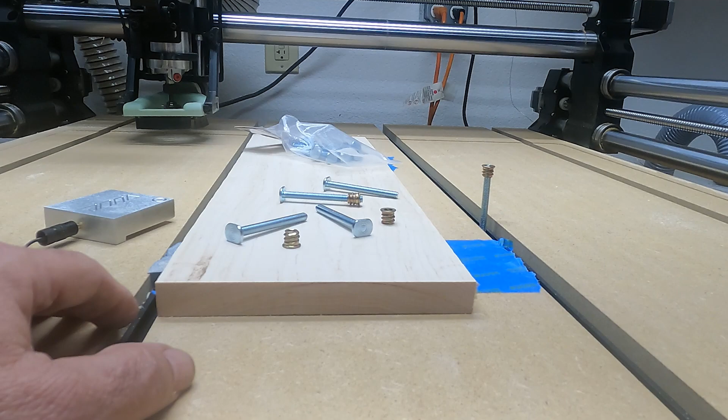So today we are going to design some wood clamps for my Onefinity CNC router. I've got a piece of hard maple here I've already surfaced down. I got it right to the right thickness and it's already attached to the board ready to go. I've got T-bolts here, 2.5 inch T-bolts. I've got threaded inserts. I'm going to make my own knobs to clamp these down with too.

So we're going to design this thing, and then I will probably do another video and we'll actually cut these things out, and then I'll do a separate video for the knobs too. Okay, so here we are in VCarve Pro, and this will work in any of the Vectric software, VCarve Desktop, Aspire, it doesn't matter which one. This should all work in all of them.

So we want to create a new file, and my actual board that I've got cut out there on the CNC right now is 21 by 6.5. The actual thickness of it is 0.738. It was going to start out at 3/4, but that's what I ended up with after I surfaced it. We want to start at material surface, and we want our XY datum at the bottom left-hand corner on this design, and you'll see why in a minute. And of course, it's single-sided. So go ahead and hit OK.

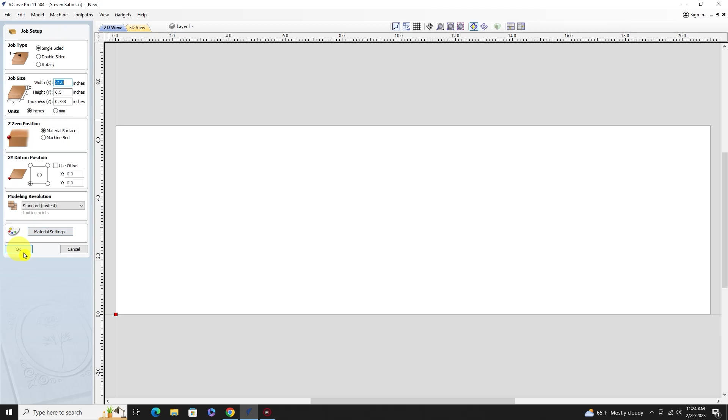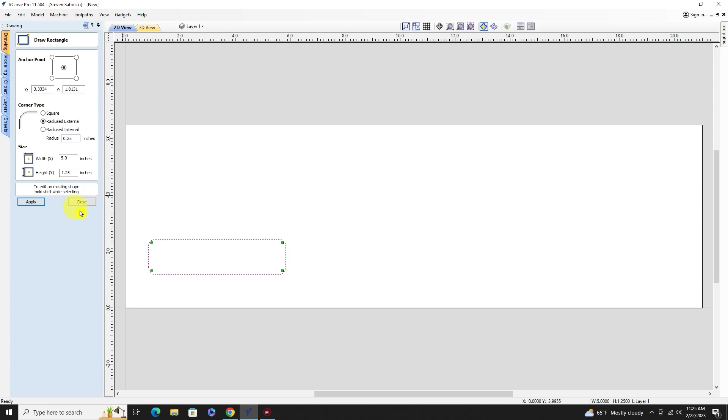So the first thing we want to do is draw a rectangle. Just draw a rectangle out, and then come in here and change the width to 5 inches. We're going to make 3 different sizes, but we're going to start with the 5 inch. So 5 inch times 1.25. And then we want to put a radius on this thing. Let's try a 1/4 inch. I think a 1/4 inch might be too much. No, actually a 1/4 inch looks pretty good. I think that's a good radius right there to start with.

So the next thing we want to do is position this thing, so you come over here on the move selected objects, and that's why we wanted to pick this lower left hand corner. So pick the lower left hand corner on this again, hit absolute, and on the far left hand side over here, I want a 1/2 inch. So let's just put 0.5 inches, and I want 0.3125 on my Y position, and go ahead and hit apply.

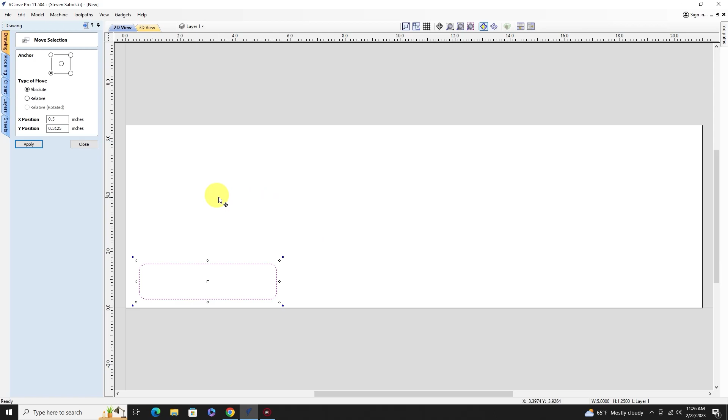And the reason is I'm going to cut this whole thing out with a 1/4 inch end mill. I'm not going to ever change bits on it. So I want to leave enough room over here where I can put tabs in. So I have a 1/2 inch. I'm going to cut a 1/4 inch out, so that'll leave another 1/4 inch of meat to attach a tab. I'm going to have tabs on the end, so I want space between the ends of each one of them. Okay, so that's my first rectangle ready to go.

Okay, so now we're ready to make our slot. So we come back in and make another rectangle a little bit smaller, and we want to make this rectangle 1 inch shorter than the actual profile here. So we want to go 4 inches here, and then our height we want to make it 0.26, and that's going to give us enough for a 1/4 bolt to go through and a little bit of clearance. If you're using a different size bolt, you may have to adjust this for your slot.

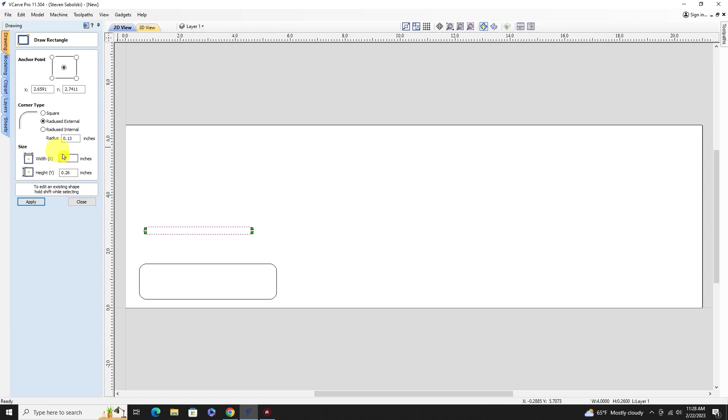And we want to leave the radius external on there, and with that size it doesn't matter what you put. You can put 0.5 on that radius, and when you hit apply, it's going to change it to half of your height. So you just want a full radius where it's going to round the ends of it off.

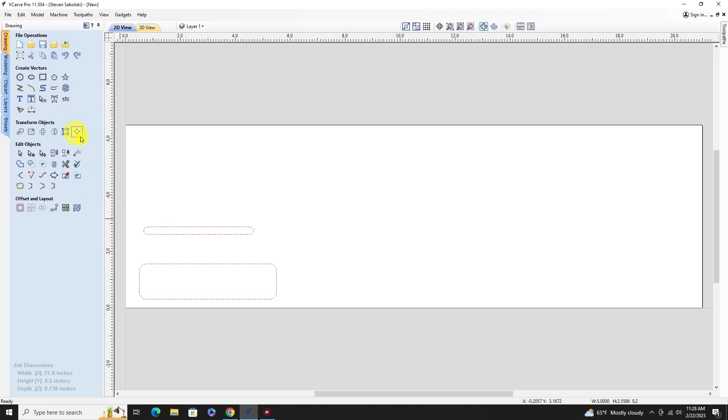Go ahead and hit apply, close, and then the easiest way to do this probably is highlight that, hold shift, highlight your other one, and then come in here on your align selected objects, and instead of align to material, you want to align to selection, and that'll sink that thing right in the center of that box right there. Okay, so that's 2 of our 3 pieces that we got to do.

The next piece, we want to make one more rectangle, and this one we want to make a 1/2 inch shorter than our whole profile, so that one's going to be 4.5 inches. Our height is 1.25, but we want to make this one a little bit bigger. This is just going to be a pocket to cut the meat out of this thing. So instead of going 1.25, let's go 1.5 on our height on that one.

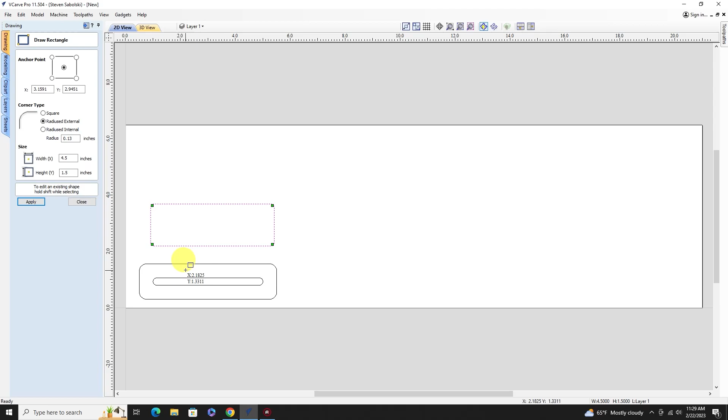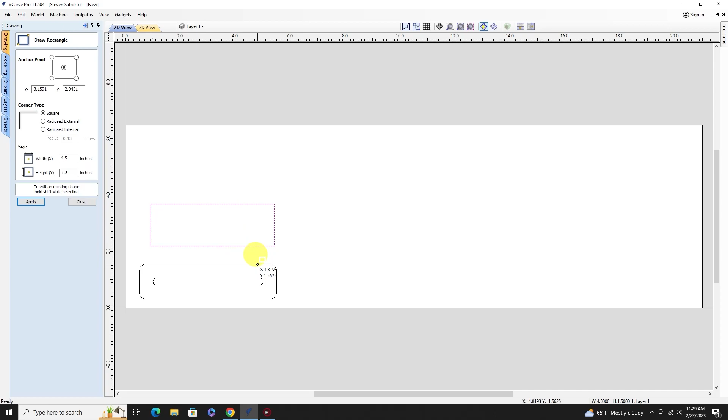While that one's selected, go ahead and hit shift, select the, oh, you got to close that first. Get rid of that. Always forget to close this over here. Oh, we need to fix this too. Go back into our rectangles, and we want that one to be square. Just highlight it again, go back to rectangles, and then square, and then enter or apply, and it'll go away. So now we got this one highlighted.

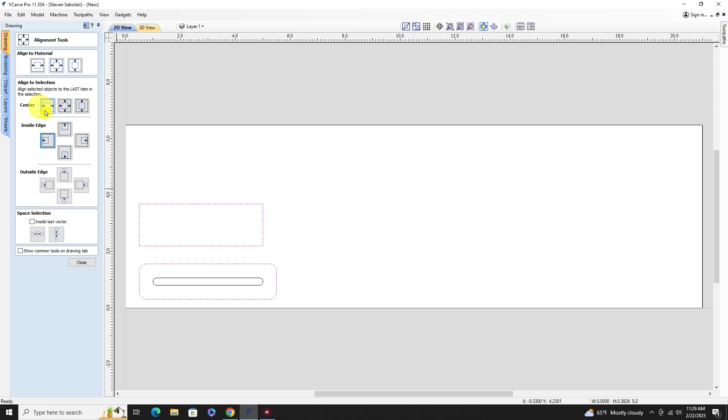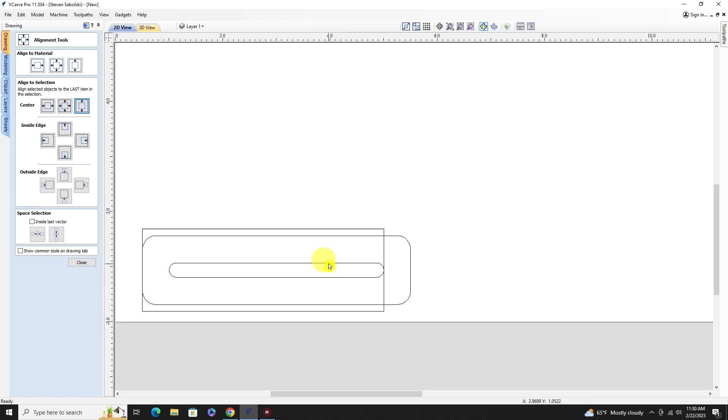Then we come in here and hit select, highlight our other one, and hit align to selected objects. I wonder if this will work, inside edge. And then we want to go there. Yeah, so this one will center us that way, and inside edge will center us there. So that gets everything lined up, and if you look right here, this line is the same as that line there. So this is going to be a profile. This outside box is going to cut the half down on this, okay? So that's all of our design. All we got to do now is make copies, and then we start making tool paths.

So go ahead and highlight this whole thing, and come down here to make an array copy. These are columns, these are rows. So we want 2 rows and 4 columns. I'm sorry, I did that backwards. These are columns, so we want 2 columns, and we want 4 rows. So that's going to give us 2 columns this way, up 4 this way. So go ahead and hit copy.

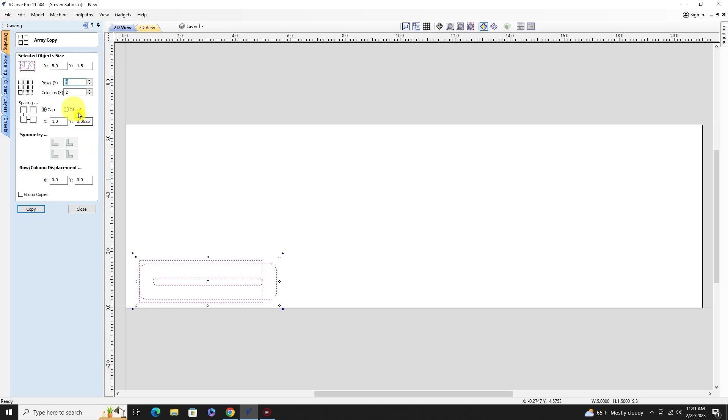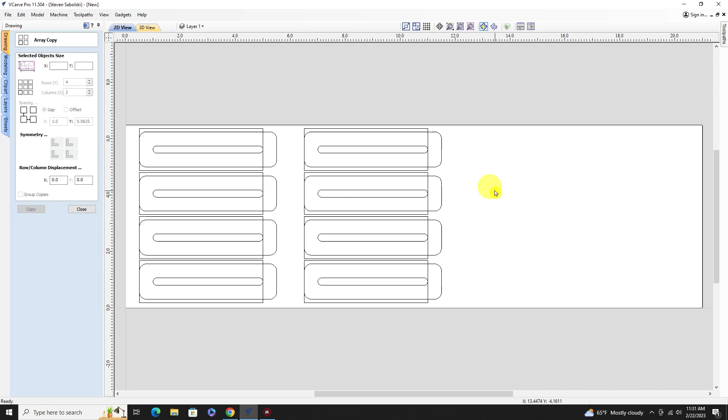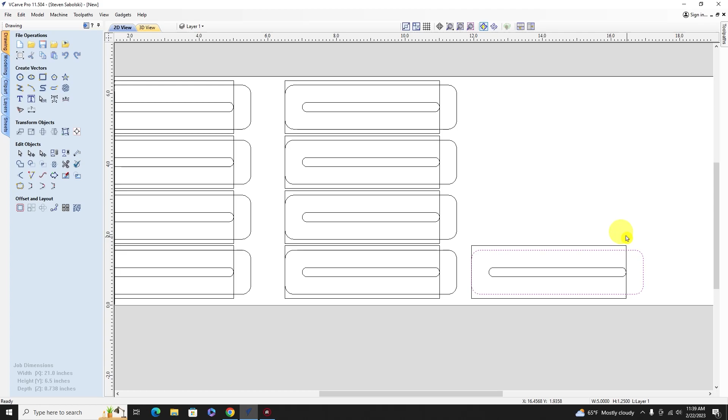The next thing, I'm going to make 4 more 4-inch and 4 more 3-inch ones. So highlight one of these, right click, copy, right click, paste, and just arrow over to move the copied one. That way it leaves our Y position the same. I'm not sure if that's going to matter, but what we need to do now is change the dimensions on this one. Go ahead and highlight that. You can resize here, just click on that. Make sure to unlink XY, because we want to leave our height the same. Change X to 4 and hit enter. That changes that down to 4 inches.

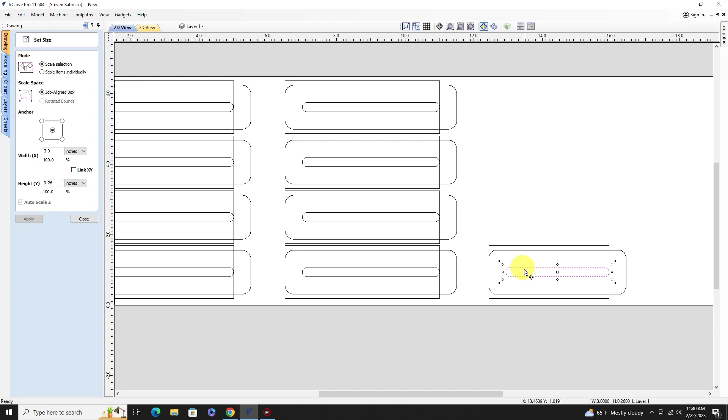Our big box needs to be a 1/2 inch shorter, so it needs to be 3.5 inches. Hit apply. And our slot needs to be 1 inch shorter than our overall 4-inch length, so that needs to be 3 inches. And hit apply. I think that's already there. Just make sure that's centered. Select that, select the profile, and then align to selection center. Yeah, that's already there. So everything else stayed lined up.

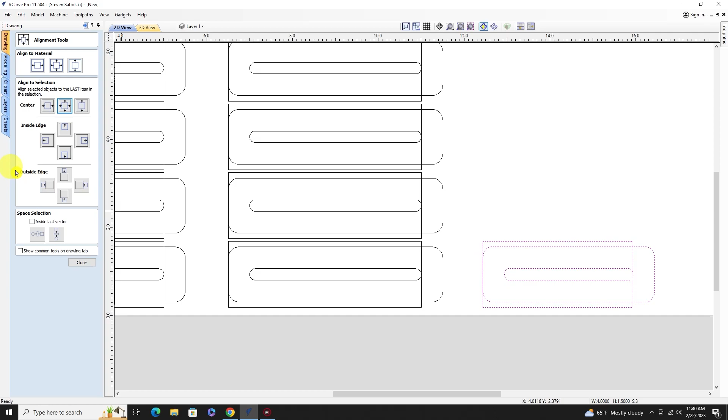So all you really had to do is resize them individually, and now you have an overall, double check that, should be overall 4-inch clamp. Yeah, we got a 4-inch by 1.5, which is this outside pocket cut. So that one's good. The next thing, we want to make sure we have our 1 inch here. So we want to highlight this, come up here to move.

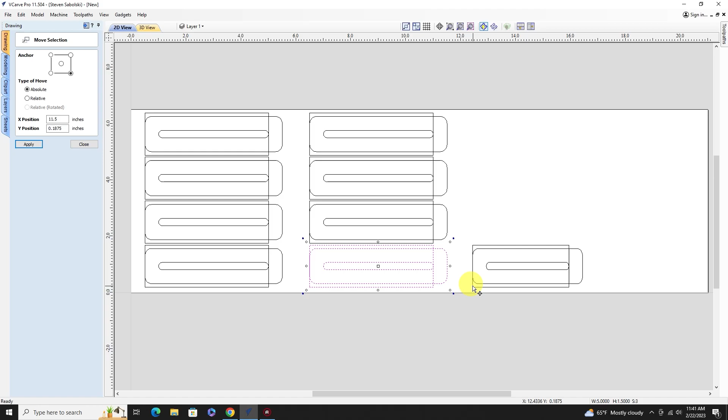Highlight move, and then we want to see where this point right here is. So you click on the right anchor point, and that position right there is 11.5. So we want the left one on the next one to be at 12.5 to give us our 1 inch. So we go back, highlight this one, go back to move, select the left anchor point, and change that to 12.5. And hit apply. And that gives us our 1 inch. 1 inch here, 1 inch there.

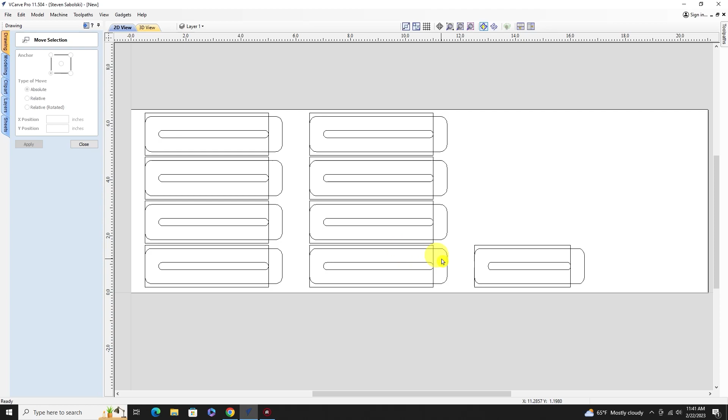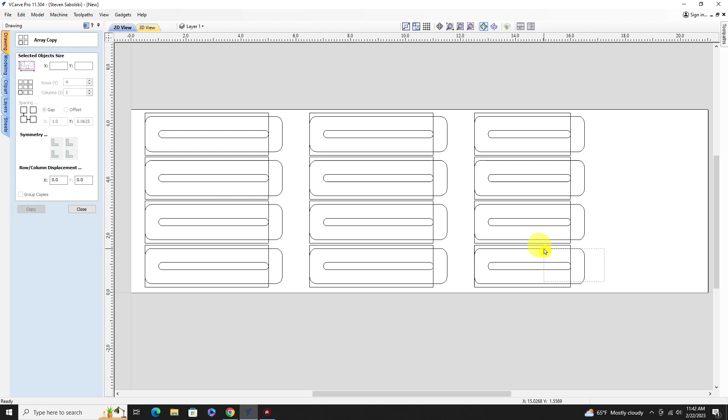So now we can take this one and we can go ahead and do an array on it. Do the array copy. And we just want 1 column on this one with 4. So that's going to be 1 column, 4 high. And hit copy. So now we got those. Now let's just do that one more time. I'll do this real fast. We're going to do the exact same thing we did on the other one. We're going to make it 3 inches.

Okay, so we've got that one. Do the same thing. We highlight the whole thing. Close that out, do array copy, should be the same settings, 1 column, 4 high, copy. Okay, so now we've got all of these 1 inch apart, pretty much centered on our board here.

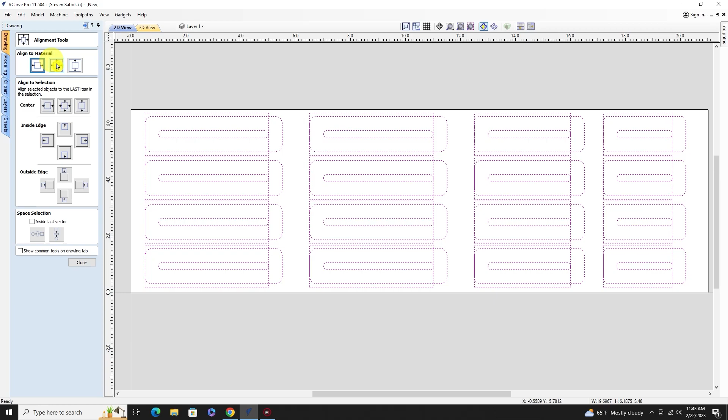And one thing before we make any toolpaths, you can't do this after you make your toolpaths, you'll mess them all up. But we can highlight this whole thing now, and we can go ahead and center to material. And that's just going to adjust it a little bit, make everything nice and even. So we got all of our clamps now, so now we're ready to start making toolpaths.

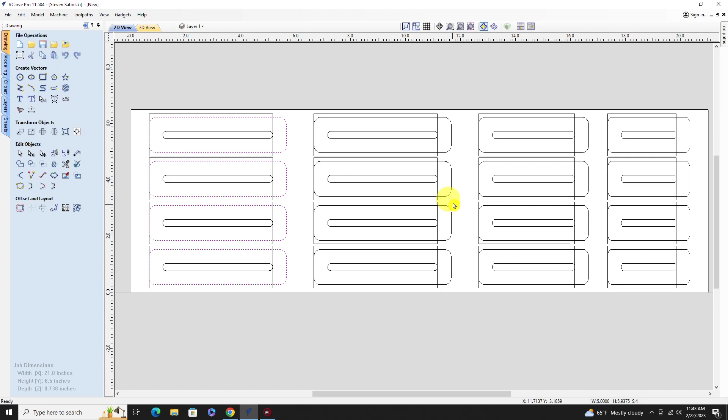And there's 2 different things you can do here. You can move or copy everything to a layer, and it's really not that much harder to do, so I'm probably going to do that. So we're going to move everything. I'll do one and I'll fast forward to the other ones. I'm trying to make these videos not as long, but it's hard to do sometimes.

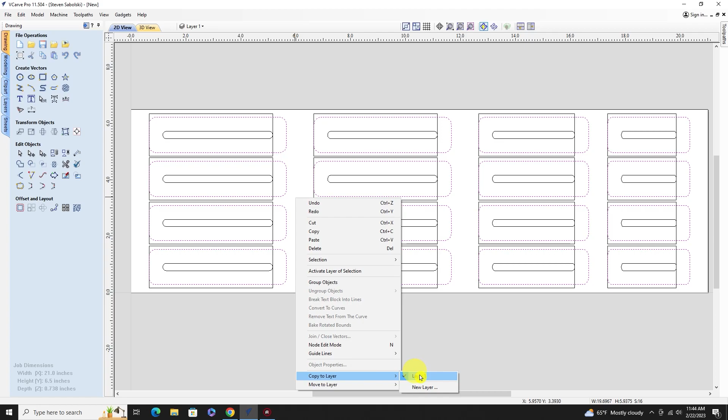So I'm just going through here and left dragging and grabbing all the profiles. So all the profiles are going to be one layer. So you come over here, you right click, and you want to copy. Do not move because it'll take them off your main board. So you want to copy to a new layer and just call that outside profile.

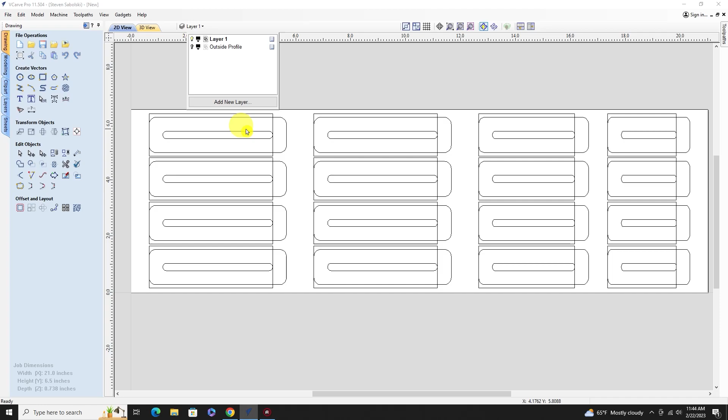And if you come up here now, you got our original layer, layer 1. We turn that off, and this is just our outside profiles on that layer. Okay, so we want to turn this back on, go back to your original layer, and we do the same thing with the slots, the same thing with the outside. I'll do that real fast.

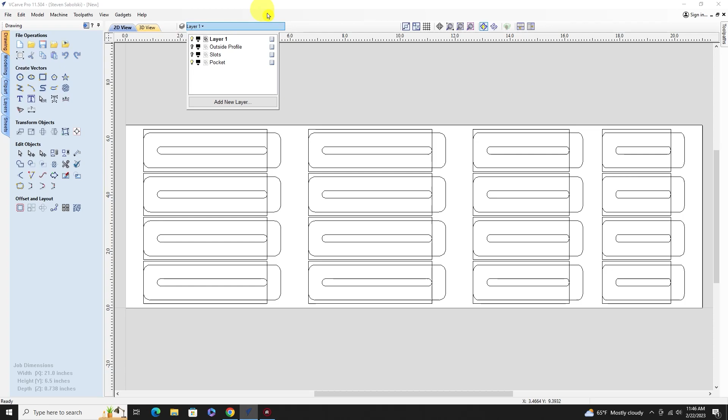Okay, so we got everything moved onto a new layer, so we turn that off. There's our outside profiles, there's our slots, there's our pockets. So we're good to go. We're ready to start making toolpaths now. So let's go ahead and go with our outside profile first. So just turn off everything but your outside profiles and highlight it.

And then you can either click on it to select that layer, or you can come over here and click activate, and that'll put that layer. So we're on our outside profile now. So select everything. Go ahead and click on this little button to get over to your toolpaths. And this one is going to be a profile toolpath.

And I've got a new bit. I'm going to use a 1/4 inch. I haven't loaded the bit before I run this program. I'll actually load the other bit in there. But I've got a new bit, a compression bit. It's a SpeTool 1/4 inch compression bit. So let's just put this one in here for now, and then we can get our toolpaths made.

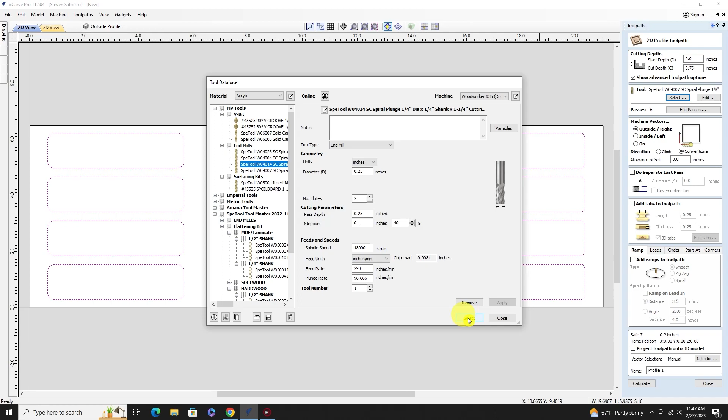And then I'm going to come back and change my bit out, and then I'll rerun my toolpaths to make sure it's going to work with that bit, so all my feeds and speeds and everything are right. So go ahead and select a 1/4 inch bit, and this outside profile needs to go all the way through our board. This is going to be our cutout.

So our board was 0.738. So whatever the thickness of your board that you're making these clamps with, that's what you need that to be. So we got our tool in. We're going to start at 0.

We're going to cut to the bottom of the board, and outside right is fine. Don't need a separate last pass because we're cutting all the way through anyway. We don't need ramps with a 1/4 inch end mill, so we're ready to calculate. So hit calculate, and then preview all toolpaths, and that's going to cut all these out.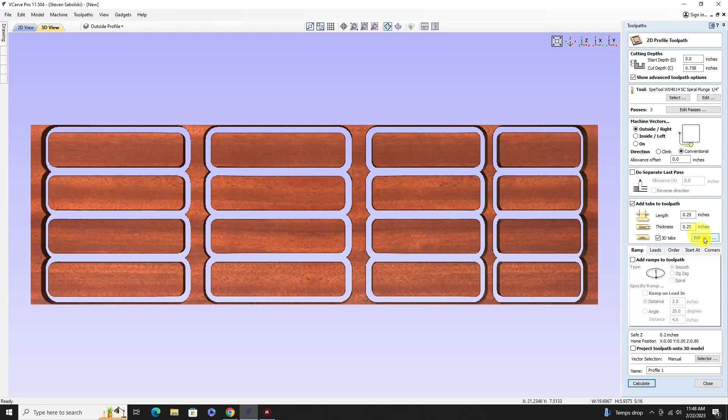So now the one thing that we do need to do here is we're going to add tabs in this. So we'll go back, double click on your tool, and right here we're going to add tabs to a toolpath. I played around with this a little bit, and I think what's going to work, I hope it works, is a 1/4 inch length, 1/4 inch thickness, and the 3D tabs. The 3D tabs give you this little pyramid look to it. So we're going to hit edit tabs.

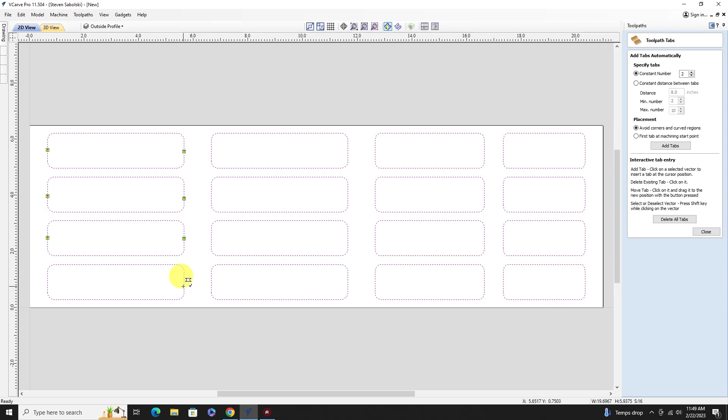What I like to do, I've tried this where you let them put them in, but it never puts them where you want them. So it's easier just to leave that blank. Don't click anything, and just click where you want your tabs. I'm just putting the tab somewhere in the middle on the end. I'm hoping this will hold it in just fine, and that's why we left that 1 inch in there too. And it's going to be relatively easy to sand these tabs off on that end right there.

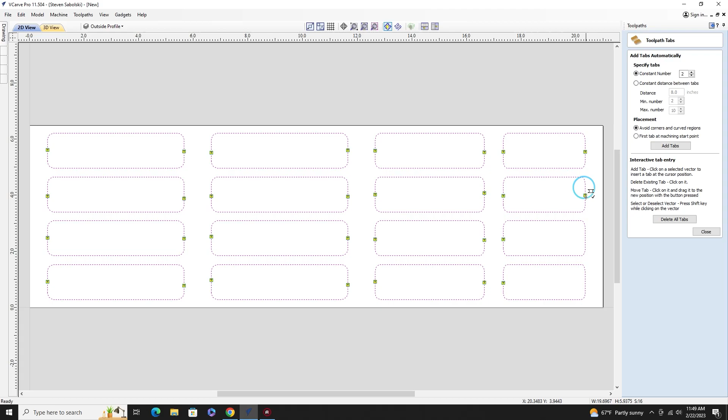You don't want to put them on a corner, because then when you sand it, you've got to try and sand your corners and make them look right. Let the machine make your corners good. All you have to do is just sand off a flat surface, and it should be pretty easy to do. And this is the only place we should have to put tabs on this.

Okay, so you hit close, and we're going to recalculate. Make sure you recalculate after you add your tabs. Reset the preview, and then preview all toolpaths. So now we've got our tabs on the bottom. Hopefully that'll be enough meat to hold those in there in place.

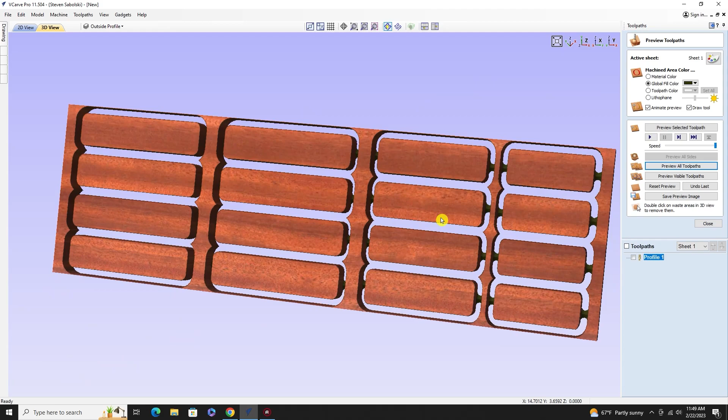Now, I made this profile first, but I'm going to rename it, and I'm going to put profile, and then run third, because you want to run this last. You want to do all your other hogging out and putting your slot and all that stuff in before you run this profile, because if you're trying to do all that other stuff, it's more likely your tabs are going to break loose. So go ahead and hit enter on that.

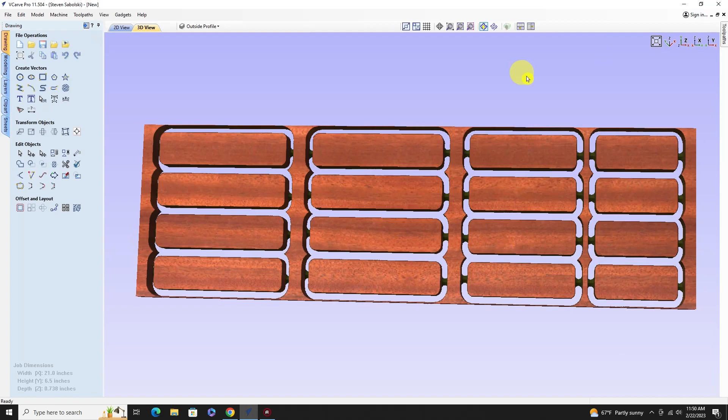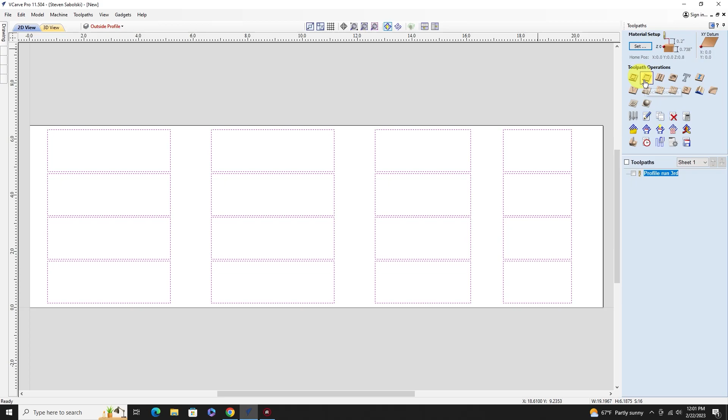So we're good to go. I did it first on creating the toolpaths, but I want it to run last. So go back to 2D view, and now we can do our slots next. Actually, let's do our pocket next, because I'll show you why. So we select all of our pockets, and then we go over to toolpaths. Okay, so we've got all of our pocket cuts highlighted now, and this is going to be a pocket toolpath.

And so our cut depth, our whole board was 0.738, and this pocket cut needs to be half of the thickness of our board. So on this pocket cut, I believe I did it already, it's 0.369. So that's half of my 0.738. If you started with a 3/4 inch board, it'll be 0.375. So you want to go halfway down with this.

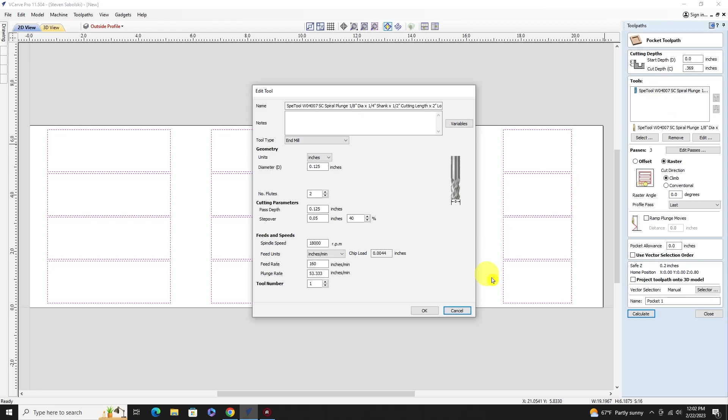Let's see, I need to remove that one. And we want to select our 1/8 inch end mill. Like I said, I'm going to change these end mills and recalculate before I actually run the program. So we'll do that with a raster cut, and we can do a profile pass. Probably isn't really necessary, but we do want to do a final last pass on this one.

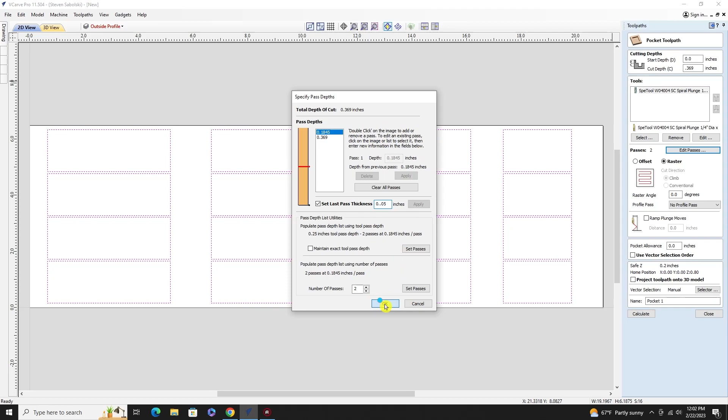So hit set last pass thickness, and let's just say 0.03. Let's go 0.05. We'll do a final last pass. That'll make that a little bit smoother. And hit OK. So that's going to run a final last pass on that.

And we don't need to ramp because it's an end mill. We don't need tabs or anything else. So we can go ahead and calculate that one. So let's go ahead and just run that toolpath. So this is our selected toolpath.

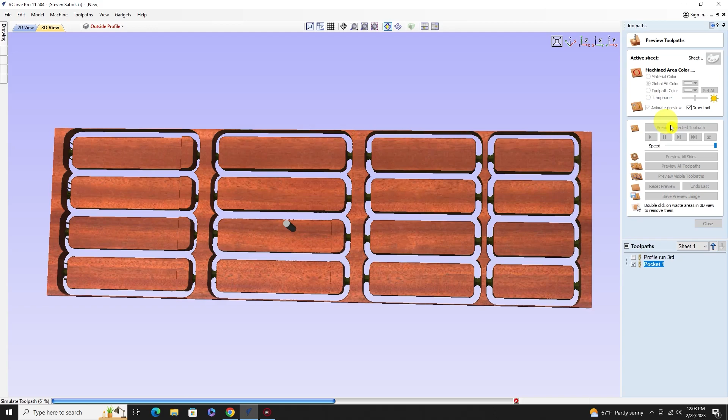And then now we take this and we tilt it up and look. And there's the shape of our clamps. Okay, so that should be half the thickness of our clamps, full thickness on the bottom, and then the half there. Okay, so that's taken care of, so we can close it. Before we do that, let's go ahead and rename that.

And this is going to be the first path that we run, because we don't want to put our slots in first, because then we're taking the slots out of the full thickness, which isn't necessary. So we come in here and we say that one's going to be our pocket path, and then we're going to say run first. And you'll see why when we generate the G code why this is nice to put these in there, because it just reminds you, hit enter, it just reminds you of what you're running, and when you look at your G code, you know exactly which path each one is.

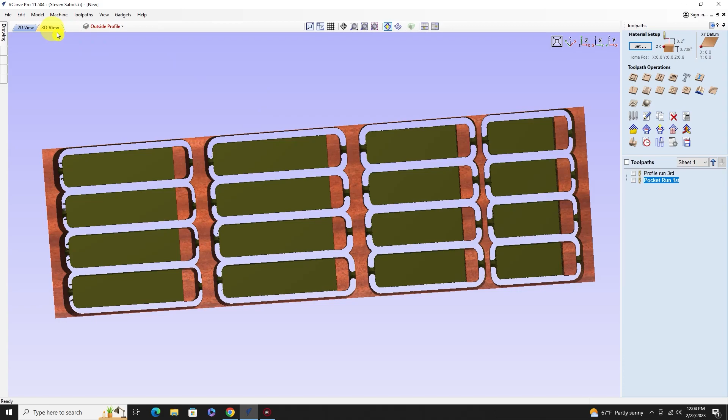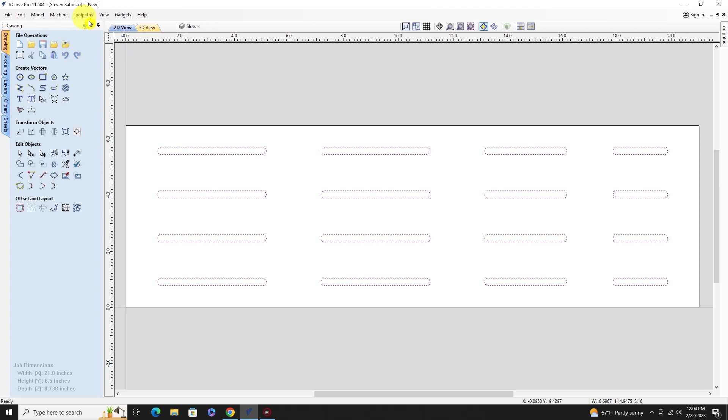So we come back to our 2D view, and we turn that off, our slots, we activate the slots, and our slots are gone. Where did my slots go? Oh, they're turned off. Okay, so there's my slots. So we highlight all the slots, we go back over to toolpaths, and this one we are going to also pocket. So we're going to use our same 1/4 inch end mill.

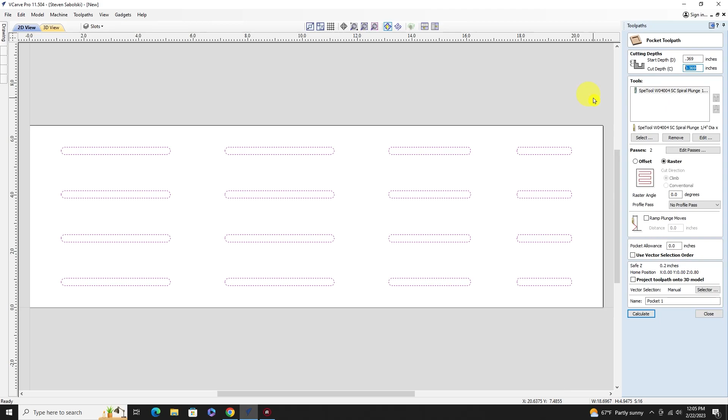Our start depth on this one is going to be 0.369, because we already hogged out that area where this slot's going to go. So we're starting at 0.369, and then our cut depth is 0.369, so that should cut that all the way through. And the raster is fine. It's not really going to matter because this thing is literally like a thousandth of an inch over what the width of it is, so it's not going to really make any difference. We don't need to change anything else.

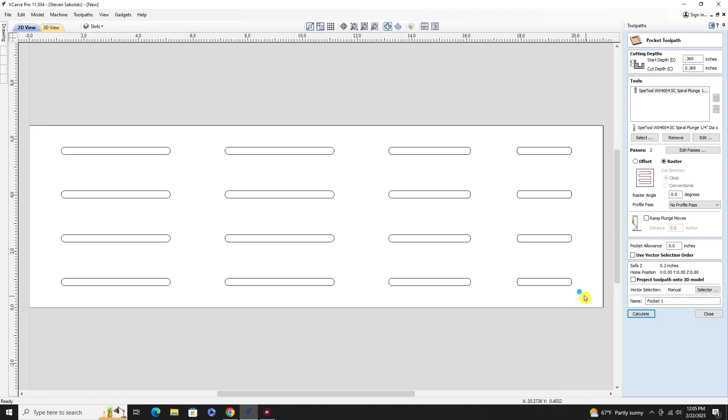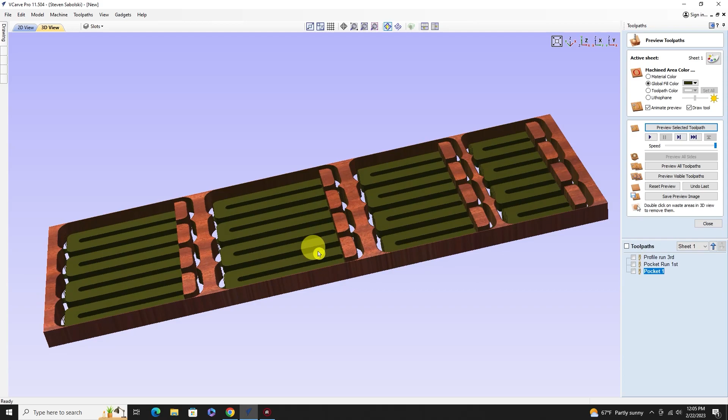And go ahead and hit calculate on that. We lost our selection, so select them again, hit calculate, and let's go ahead and preview that toolpath. So there's our slots. We went all the way through. We didn't get a warning, so it didn't go past the material thickness. It just went right to the bottom. So there's our slots. So that's it. The last thing we want to do, we want to rename this one. And we want to call this slots, and then run second.

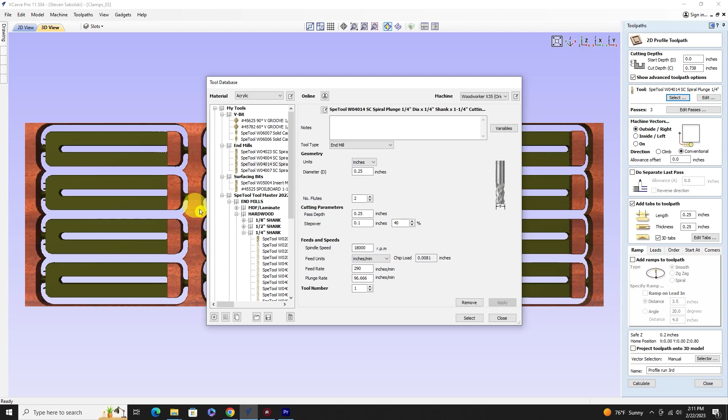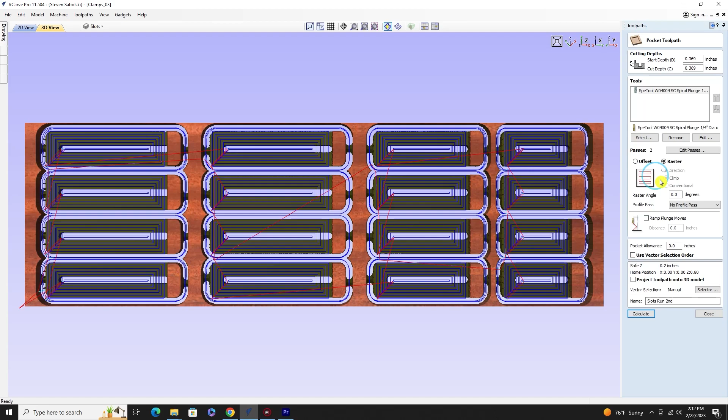Okay, so I've got my new bit loaded in the database. So we're going to come in, we're just going to rerun all three of these profiles real quick. So we're going to select a new bit, and open this up if I can see it. That's my bit right there, the W02003. So we're going to hit that and hit select. That was set for the hardwood settings. So then we just want to recalculate, and then I'm going to do the same thing on all three of these. Okay, so I have my new compression bit loaded into all three toolpaths.

So I think what I'm going to do now is we're going to select all of these, and we're going to see how long it's going to run. It says it's 29 minutes total to run the whole program. So that's not too bad at all. So let's go ahead and copy the G code, and we're just going to go visible toolpaths to multiple files, and we'll just have to run all three toolpaths. And do we have them in the order that we want them? No, we do not. It doesn't matter really, but I'm going to go ahead and readjust them. So we're going to move this run first one to the top, run second, move that up to the second. So run first, run second, run third.

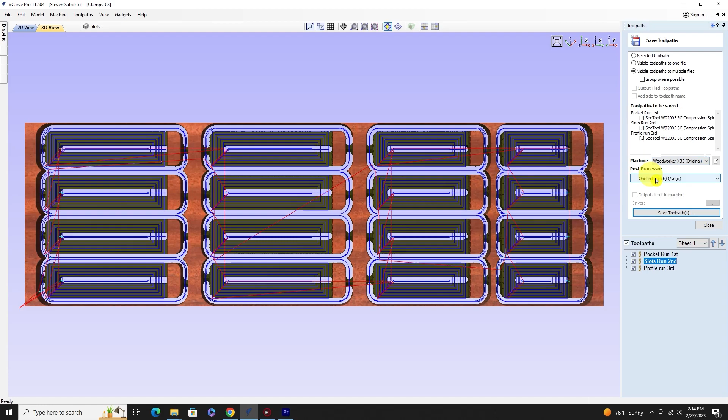And now we're going to come in and save toolpaths. Visible toolpaths to multiple files. That's what we want. We've got run first, run second, run third. Go into the Woodworker, Onefinity is the post processor, and we're going to save toolpaths, and we're going to go here to our USB disk, Onefinity G code. Okay, and we're going to call this clamps for Onefinity.

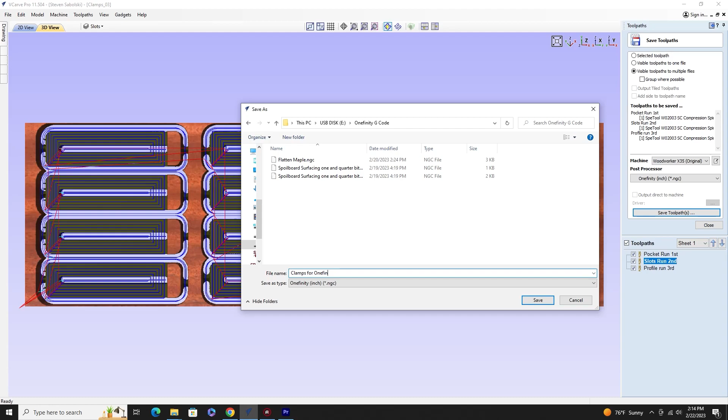So we hit save. Now we've got clamps for Onefinity 1, that's the pocket first run, clamps for Onefinity 2, slots second run, and then clamps for Onefinity 3, profile run third. So that's perfect. So we're ready to run this thing. I'm going to go ahead and do another video, a separate video of actually cutting the clamps out. This one got a little bit long.